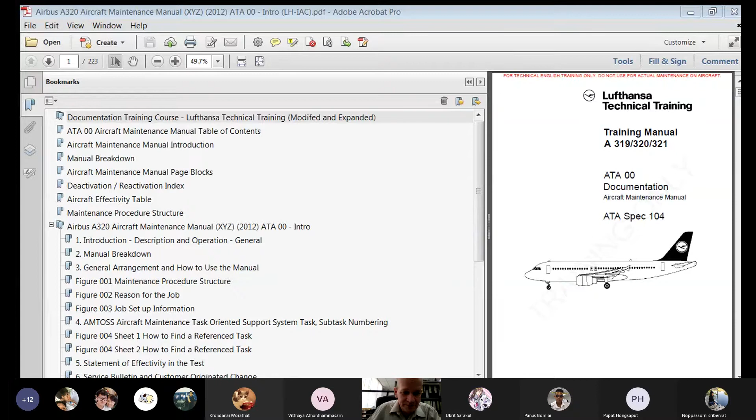16,000 baht. Right? Per day, every day of the year, 16,000 baht, almost $500 a day. Somebody's going to just give you $500 cash every day. Will you take it? Are you happy? Happy? Will you study? Don't know. Either they don't like money, Director, or their microphones aren't working, or they're sleeping.

So why do we study? Why do we go to school? Why do you study to be an aircraft engineer? You could have been a doctor, could have been a lawyer.

She says I need to hit something to make it a group call here. I think maybe we have this working. So anyhow, I assume you guys can hear me? Yes, no? Yes, we can hear you. You can hear me. 16,000 baht. Can you say 16,000 baht? 16,000 baht. Panus, can you say 16,000 baht? 16,000 baht. Mr. Panus. 16,000 baht. Can he say it? Nope. Yep, no. Okay.

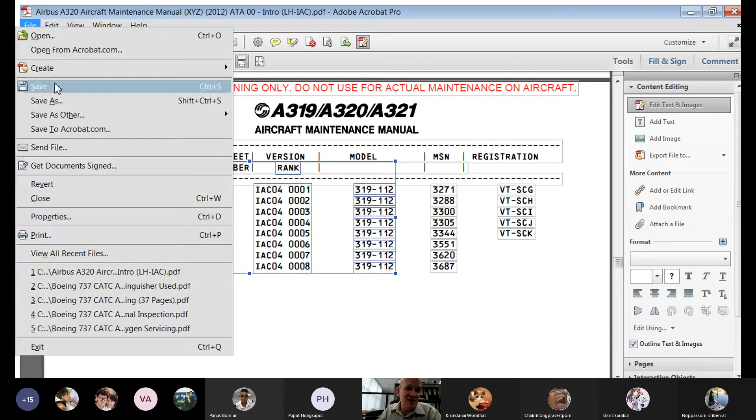The reason being is sometimes I can go in and change the text. I've done that in some places, heavily on the Boeing manuals, by the way. There's a lot of things in the manual where I've gone in and changed what it said, and you may not find that information is correct anymore. Some of that was done on purpose so that we could have training material that fit a little bit better than what the original version said.

Okay, so if you see this R right here, there's an R as in Romeo right here. This indicates that this part of this page was revised. In this case, they have aircraft in their effectivity chart, Indian Airlines. They've got serial numbers 3551, 3620, 3687. At the time they did this manual, they probably were still on the factory production line. They just ordered this airplane. It has not been registered yet. These three aircraft do not have registrations. They're not actively flying yet, so they may still be on the factory floor being produced.

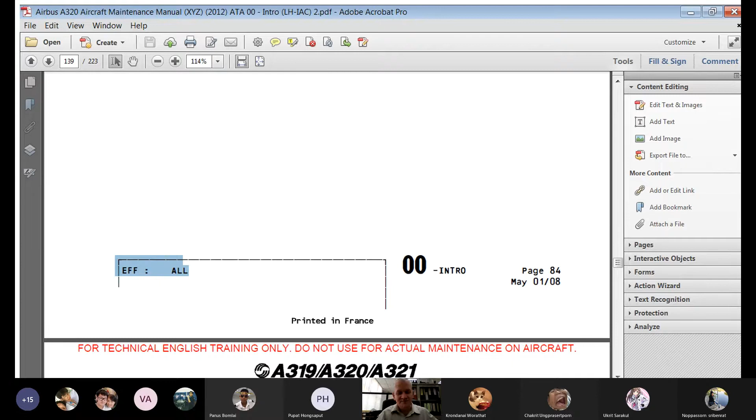And then this is May 1st of 2008. That's the date this page was effective. That's the revision date. Effectivity. Effectivity is a strange sounding word. It's only used in aviation. If I'm working on aircraft, what airplane numbers do they use here? Customer fleet serial number. So they'll say 902. You might be working on 902, but at this time in 2008, you wouldn't be working on aircraft 907 or 908 or 909 because they're not registered yet. This airplane here was nice and new back then, aircraft 906.

Notice that has nothing to do with the serial number of the airplane or the registration. Continental was nice to us. If we had an effectivity number of 906, then the last three numbers in our registration number would be 906. They would arrange with the FAA to get a registration number whose last three numbers always matched our fleet effectivity. So if you didn't know what airplane effectivity you had, you could just look at the airplane and say, oh, we're working on 021.

United Airlines uses 4-digit effectivity numbers and they paint those on the nose gear door. Sometimes United's numbers don't really correlate to anything logical. So if you're working on a United Airlines airplane, you have to look at the nose gear door. So continuing on. Now this is boring, but this will help you. When you're doing a project on something, you'll understand how and where to look for the information.

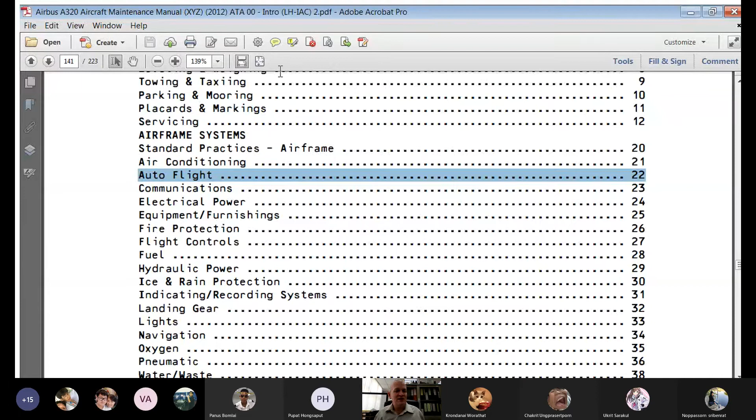Fuel system, ATA 28. On the 747, if I go to a military base, I'm in a civilian aircraft. The U.S. military, maybe they're sending troops somewhere, they charter the aircraft. Their fuel truck operator will only operate the fuel truck. He will not touch the fuel hose. He will not install the fuel hose onto the aircraft. He will not operate the fueling panel.

It'll be my responsibility to drag the hose up, hook it up to the airplane, and then I have to put the fuel into the tanks. He'll turn the pump on the truck on. I have to control which tank I'm going to put the fuel in and make sure that my fuel load matches what I want for dispatch. However, the process on how to fuel, how do I fuel a Boeing 747-400? Oh, do I look in ATA 28?

Hydraulics, do I look in ATA hydraulics? Oh, I want to add hydraulic fluid to the reservoir. ATA 29, hydraulics. Landing gear, I want to service landing gear. Need to put nitrogen in the landing gear strut or hydraulic fluid. I want to put air in the tire. By the way, don't put air in tires on commercial airplanes.

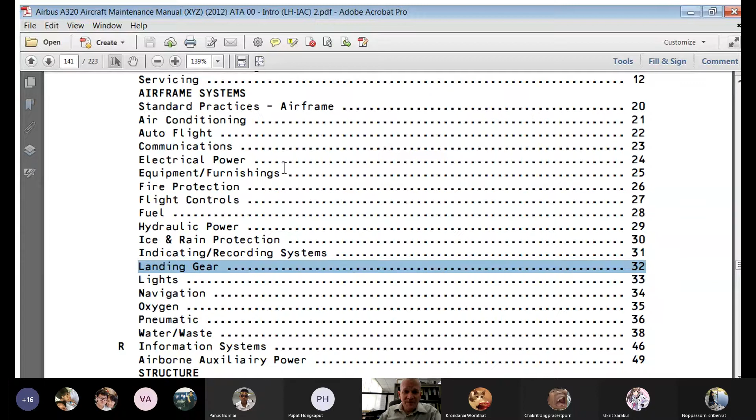So now we've mentioned all these systems, but we're servicing. This is the question. How do I service the fuel? How do I service the toilet system? Oh, ATA 38. Glad I don't do that. That's dangerous. ATA 12, servicing. Most of the GenFam tasks that I have on the folders, I put the links on Facebook, you guys can download them. Most of those tasks are from ATA 12, from servicing.

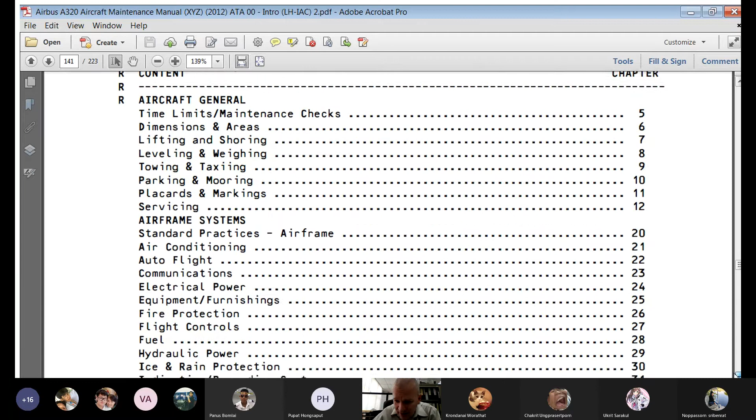How do you add oil to the engine? How do you even clean cockpit windows? How do you do these things? It's in ATA 12. So it's important to know your manual breakdown. What chapter will you go to? Somebody asked me earlier, because they looked through this, they said, teacher, where's ATA 37? Very interesting that he saw this.

There is no vacuum, ATA 37, on Boeing aircraft. We don't have a need for vacuum systems. Some older instruments, some older systems, you had to have a vacuum pump, a mechanical pump turned by the engine, to create a vacuum pressure. On these commercial aircraft, we don't have any ATA 37. So you won't find 37 in Boeing or Airbus aircraft.

Most aircraft will have a 71 and a 72, both A320 and 737. They follow a pretty good logical approach in terms of what things go in 71, what things go in 72. The actual basic engine, without the thrust reversers, without the cowling, those things will be in ATA 72. The things that are outside of the actual engine that you would lease from the company, things more attached to the aircraft itself, like the cowling, they would put into ATA 71.

Standard practices, you notice it's 70. Standard practices engines. If you have something, maybe it's not covered in 72, check your ATA 70. Things like torques. How do you use safety wire? What lock wire procedures do you have? What kind of safety wire can you use on an engine?

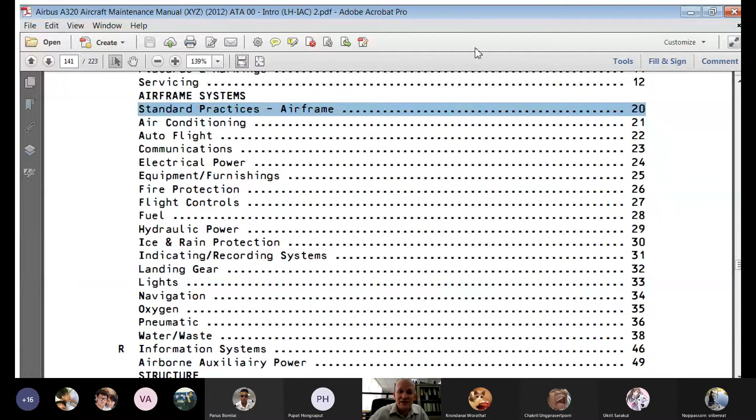Standard practice is airframe, ATA 20. So a lot of the things that you would do on the airframe that are common tasks, these would be in ATA 20.

Any questions? Anybody awake?

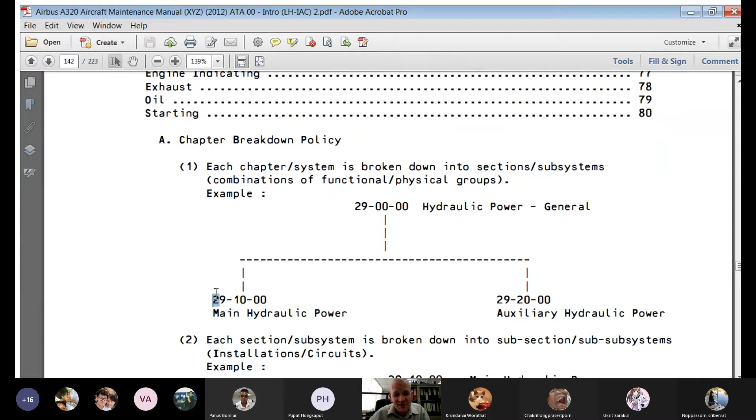So within your chapters, you'll have a breakdown of things where, like, ATA 29 is your hydraulics, general. ATA 29-10 is main hydraulic power. ATA 29-20 is auxiliary hydraulic power. So they have things called ram air turbines, like a backup source of auxiliary hydraulic power.

That would be here. To open a cargo door in an A320, there's a small little electric pump that will only operate a hydraulic system, so you can open the cargo door. I would imagine, if I needed to look for that, I would look in 29-20 first. I don't think that would be under 29-10.

So 29-10 itself then breaks down into 29-11 for green, main hydraulic power. ATA 29-12 is blue, main hydraulic power. #1 engine. On most Airbus aircraft, you're going to have pumps on both engines. A320 is a little different though, but A320 we do have an engine-driven pump. Green main hydraulic power.

A300s, we had 2 pumps on green system, #1 engine. We had 2 engine-driven pumps on blue system. And then yellow system, sorry, we had 1 pump for green, 1 pump for blue. We had 2 pumps for yellow system on A300. A320 doesn't do that. They use something called a power transfer unit. And then they have the 1 engine-driven pump.

We'll deal with that later because that's a little more difficult to explain. This is just how you use the manual system. But I know there's probably at least one person out there who knows how this Airbus system works, but the A320 is a weird airplane hydraulically.

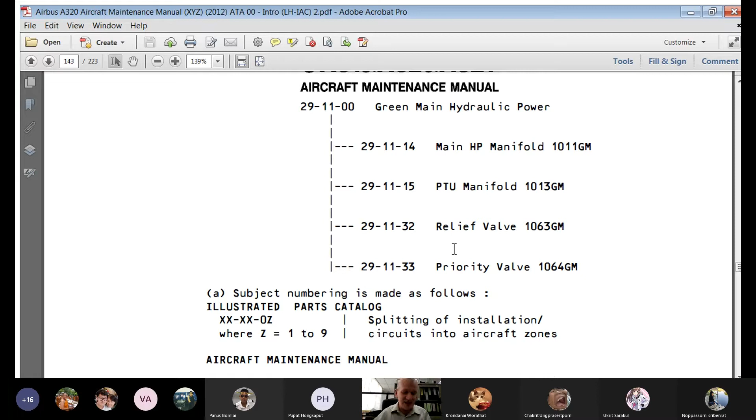This manual is February 1st of 1996. A lot of things have happened since 1996. Maybe the information is different. So you don't want to work from memory, because we've had cases where people have gone and signed things using their cheat sheets. And then they'll have specific task numbers that will have changed. And they sign off using an out-of-date reference, and then they end up in trouble because they didn't actually use the manual.

So also in Airbus, Boeing, you're going to have standard practices manuals. For Airbus, they just have one standard practices manual for the airframe, then they have an electrical standard practices manual. Boeing will have a standard wiring practices manual, and then a standard overhaul practices manual.

Now, standard overhaul practices, you would think that doesn't apply because I'm on the flight line and it's a through flight. But still, a lot of Boeing manuals will refer you to go to the SOPM. If you're going to repair, let's say, a cabin floorboard has a fault, you need to do a patch. It may refer you to the standard overhaul practices manual.

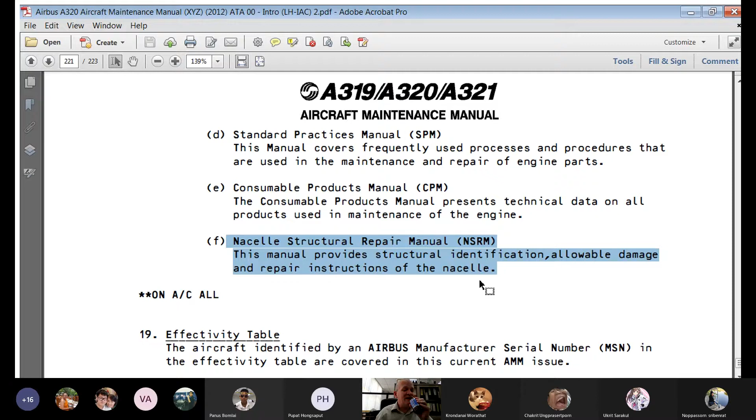But effectivity table. You will want to make sure that for your aircraft fleet number, you're using your correct effectivity. So in this case, they say the aircraft identified by an Airbus manufacturer serial number in the effectivity table is covered in the AMM. So you would not want to use some of the manuals that I've given you guys that you can download and you can read for fun.

You don't want to use one of these manuals to work on an airplane from a different airline, because a lot of times some of the options that were available for Continental Airlines may not have been available for the airplanes that went, let's say, to China Southern. And then things like torques may be completely different.

So for Indian Airlines, you can see there's going to be a big difference between aircraft 14, which is in this block, and aircraft 901. Aircraft 14 is an A320. Aircraft 901 is an A319. Different size airplane, but also completely different engines.

CFM56, this is the same type of engine that you're going to find on your 737-800 series aircraft. The 737 uses a CFM56-7B. The Scarebus uses a CFM56-5. Indian Airlines with their A320s, A320-231 series, they're using the V2500. This is an engine that's made by an international consortium. One of the biggest manufacturers that's part of this organization is Pratt & Whitney. You guys know Pratt & Whitney from your T6 engine.

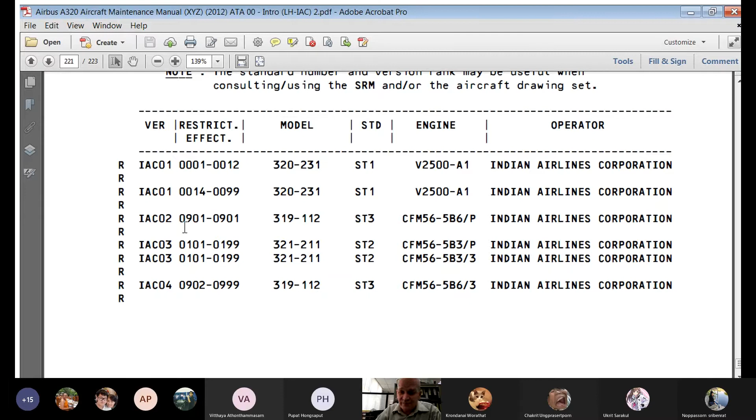So you guys are all smart. Nobody's asking any questions, so I'm sure that you're all experts on how to use manuals.

In this document right here, February 1st of 2007, you'll notice that there are all of these R's here. What do these R's mean?

Pirate movies, they all say R. Pirates of the Caribbean, R. R, matey. Gotta watch the R's.

The R means revision. Something has been revised. In the case of this particular page in 2007, I would guarantee that all of these are actually not things that have changed, but they have completely added all of these sentences that are here. So they're saying specific features for the AMM and AirNav/maintenance environment. They give out DVDs. We have some of these upstairs in our library, where the entire set of manuals for this airplane is now provided in the digital environment on DVD in something called AirNav.

And then Airbus would then issue out other DVDs with temporary revisions that somehow would either just be viewed separately, which is what I suspect, or they could actually come in and patch like an update and change the data. We have these discs upstairs for A330, A340, but unfortunately we no longer have Windows XP. I think Windows XP was the most advanced computer system that would operate these disks. So I've tried to get some of these to run, but they don't.

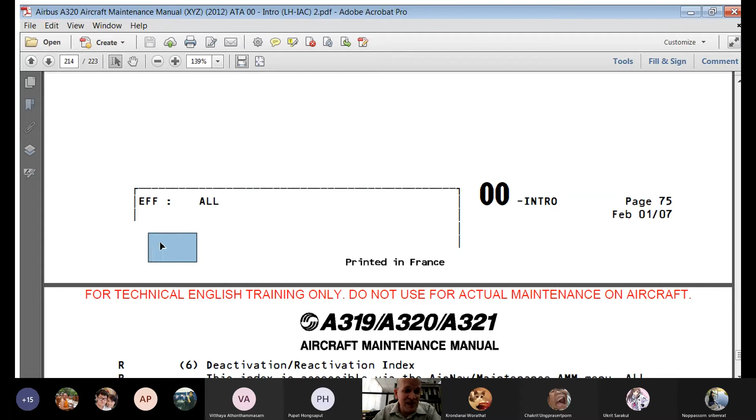Effectivity. Effectivity means that this manual covers all aircraft that are operated by this airline. Down here, normally, it would have a 3-letter code identifying the airline. And I think it was IAC for Indian Airlines. But I edited it out because this is for training only.

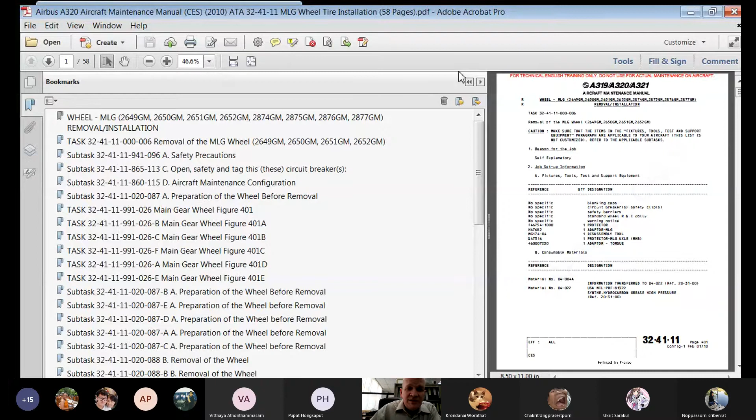So for those of you who have seen an Airbus A320, you will recognize this. There are 4 main landing gear wheels. Each wheel has a brake inside of it. There are no hydraulic brakes on the nose wheels. However, the Boeing 727, they actually had brakes in the nose wheels on some aircraft. I just saw that the other day for the first time on the internet. That 727 that this guy was operating, they had brakes in the nose wheels as well as the main.

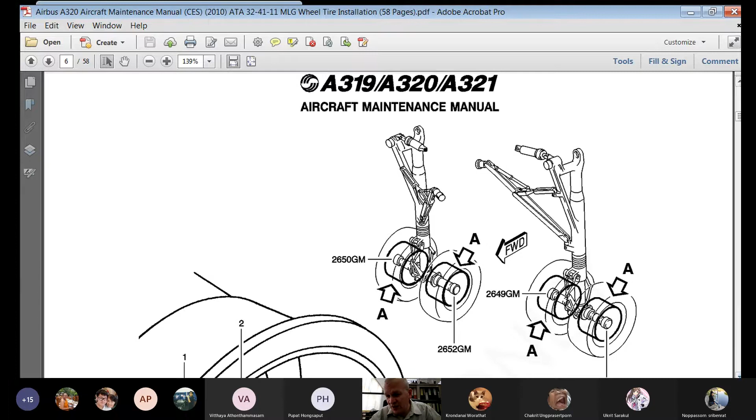So most of you guys, when you see your 737 or your A320s at the airport, you're going to only have 2 wheels on each axle. Each of these components is identified by an FIN, functional item number. So right here, this 2650GM, this functional identification code, is used in every manual: IPC, troubleshooting manual, wiring diagram manual, system schematic manual. All of these manuals across the entire system will use this number.

So if I had a computer with my Boeing toolbox inside of it, or Airbus airplanes put into that, you could find these numbers. Boeing uses a similar system, and I could type in that number and it will cross-reference every time that item is referred to in every manual across the entire fleet. This will greatly help troubleshooting. I think I'll have 11 different manuals that cover different parts of the Boeing 747, but with these identifying numbers, it'll pull up all of the suggested things I should look at across every single manual system.

So with this picture here, we have 4 main landing gear wheels. At the bottom of the page, we will notice that our airline effectivity is CES. I believe this is China Eastern Airlines. So in China Eastern, from aircraft 01 through 49, 101 through 149, this particular picture covers those aircraft. Airbus, you have to be very careful because this says configuration 1.

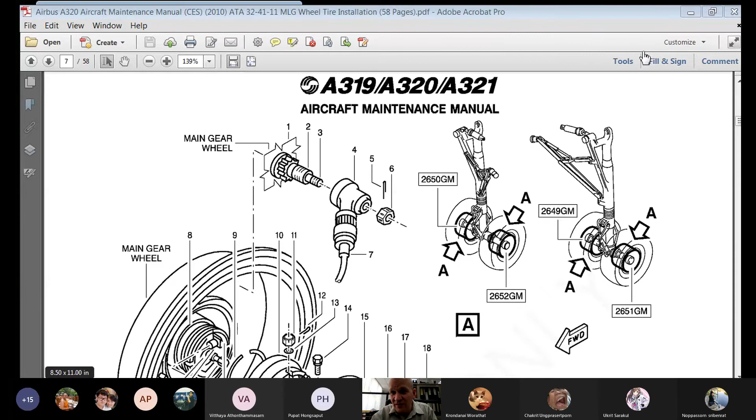So effectivity is important because we have to know what configuration aircraft we're working on and have our manuals reflect that. We don't want to use manuals from a different airline because maybe the information is not the same. And I will show you an example of this.

We have extra music in the background for... there we go. Can you see this, engineers? Yes? No? No, you can't see this? Yes, I have seen it.

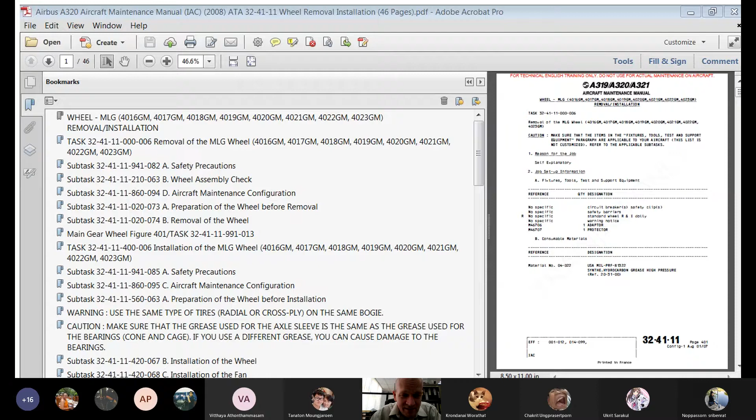Okay, now maybe it's hard to see, but you notice the letters don't look quite so clear, a little bit more fuzzy. This is IAC, so this is Indian Airlines. Previously, we were looking at CES, China Eastern. If we were working on Thai Smile, it might say TII or TYS, and I can't remember which. Between Boeing and Airbus, somebody uses TII, somebody uses TYS. So if you're working on an airplane that came from Indian Airlines, IAC would be what you'd want to see down here. Effectivity.

Indians are superstitious. They're following the British superstition. In Britain, you're not going to have an aircraft 13. Passengers won't fly in it. If they see 13, they'll be scared, they'll run away. I have seen an aircraft 13, I think at Continental Express, but a lot of airlines will skip the number. So any aircraft from 1 through 12, 14 through 99 is covered by this effectivity.

So we have to watch for the airline, the actual airplane type, the configuration. This one's configuration 1. Configuration 1 has popped up again. But I guarantee you, this configuration 1 on this manual is going to be a lot different from the configuration 1 wheel and tire assembly on the other airplane. Even though it still says 324111, configuration 1, I guarantee that between these airlines, there's a huge difference.

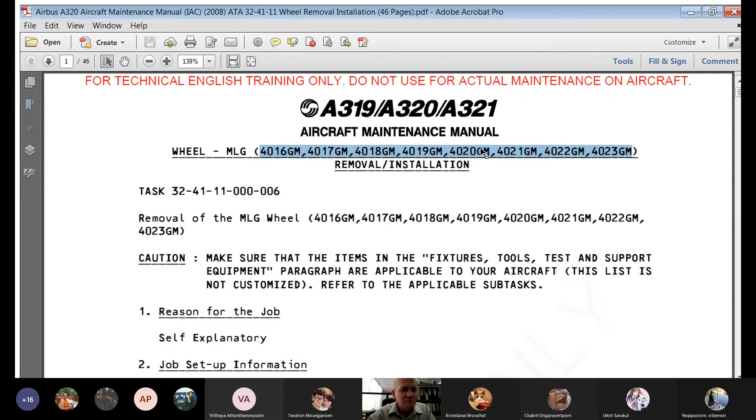Our functional numbers for our main landing gear wheel, we have 8 numbers. But we only had 4 wheels on the other airplane. Why are there 8 functional identification numbers?

And this is why effectivity can be very important. You want to make sure that you have the correct manual for the correct type of airplane, because this Airbus has got 8 main landing gear wheel and tire assemblies, each with a different FIN. Indian Airlines wanted this option from Airbus. They're the only customer that I know of that purchased it, where each landing gear has got 4 wheels. Everybody else has 2 wheels.

I hate Airbus A320 main landing gear wheel and tires, because here in Thailand, you'll have friends. You'll work, maybe 4 people will change a tire and wheel assembly together. In America, you don't have friends. You have a tire or brake to change, your friends disappear, they vanish. Suddenly you find out nobody loves you anymore, and you have to change this wheel and tire assembly alone.

This tall. The wheel and tire assembly on this airplane weighs almost twice what any of you weigh. It is extremely heavy. It is big, it's bulky, it's very hard to change. This is almost as bad as a 747 wheel and tire assembly. So for this aircraft, it'd be nice because it's a little bit easier to change the wheel and tire. But they designed it this way because there's less PSI, less pounds per square inch on your runway surface.

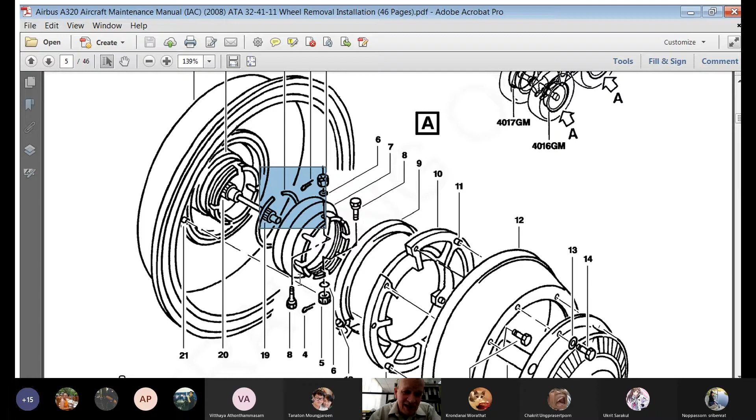You line up the slots so you can install this nut that's here. You put the bolt through with nuts. I notice these ones have cotter pins. This is very good because then these nuts won't come off. When you work on Boeing 737s, always change the nut. Always change the nut because they have self-locking nuts. So a 737 came into the airport when I was working for General Electric, and it was missing a wheel. The entire wheel fell off the airplane.

These little bolts are the only thing keeping your wheel from falling off. 110 foot-pounds of torque. If your wheel's on the axle and it spins to the left, it'll back your nut off. So you want to make sure that after you torque it, when you put these two bolts, these small nuts here, if you're working on the Boeing 737, you want to use new self-locking nuts. NAS 679A4, I think is the part number. You should have them in a bin somewhere in the shop. Grab a handful, keep a couple in your tool bag, and throw the old nuts away, change them, put new nuts on there.

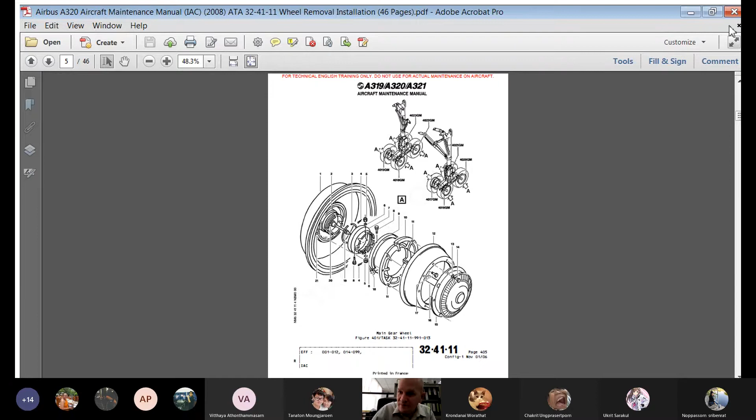Most of you guys can see Facebook. I added on Facebook Boeing 737 and Airbus A320 tasks. You can download these as a zip file from Google Drive. And I tried to pick maintenance tasks that if you go to the airlines and you work there maybe 5 years on A320 or 737, during that 5-year time, you're going to do this task, maybe every day. Some of this stuff you might do very frequently. Other things, maybe you do it once or twice here and there, but I tried to pick something from each ATA chapter, the whole system of chapters, so you guys would find things that are useful to you.

So if we want to service oil, what ATA would we use for engine oil? ATA 39 for engine oil servicing. What do you think? Anybody? Mistake I made this morning. I said ATA 39. There is no ATA 39. There's ATA 79 for engine oil. Very, very interesting. There we go. So maybe you guys have added oil. You put oil in an airplane before? Sometimes, maybe, yes, no. ATA-79 would be engine oil.

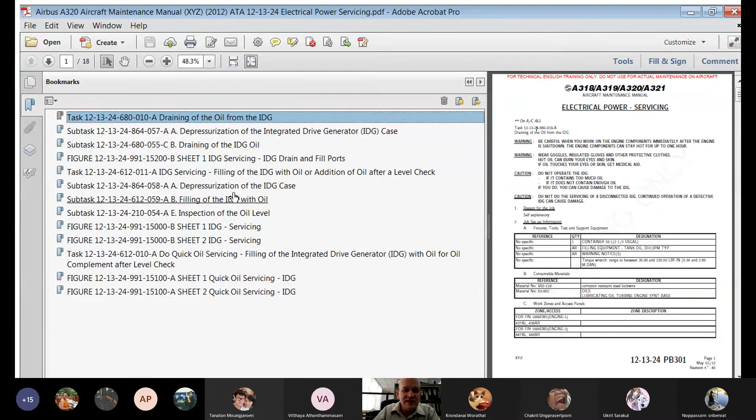We are adding oil to the integrated drive generator, IDG. These things are heavy, but they're useful. They generate electricity. Without them, you cannot fly the airplane. You need to have your generators. So you might have to fill your integrated drive generator with oil. Notice this subtask 12-13-24. If you just signed off saying, yeah, I serviced the IDG oil in accordance with 12-13-24 AMM, that's very vague. It's very general, not very specific.

If you're very specific and you say you serviced it in accordance with subtask 12-13-24-864-058-A, you'll want to make sure that you did everything that's in there precisely and that you read this task. You don't want to use your cheat book and say, oh, IDG oil, we service it 12-13-24-864-058A, and you just signed the logbook using the little cheat book that you keep in your pocket, never look at the manual.

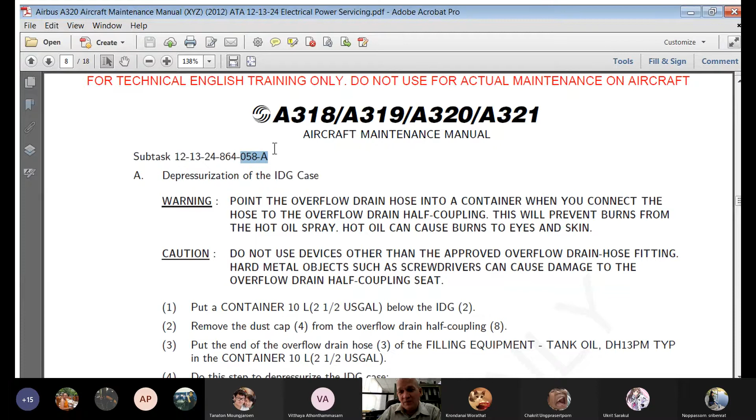Because Airbus has a fun tendency, Boeing as well, 787 is even worse, that if there's a major revision, they will completely change the last three numbers of these subtasks. So your subtask all of a sudden might be 942 instead of 058A. And then your government inspectors or your quality assurance department might see people keep signing off servicing the oil in accordance with the subtask we got rid of months or years ago. So cheat sheets: it's not about having the right answer to the exam question. When I'm out flying on a 747 over the middle of the Pacific, 45,000 feet in the middle of the night, it's about whether I was right 100% of the time about everything I did.

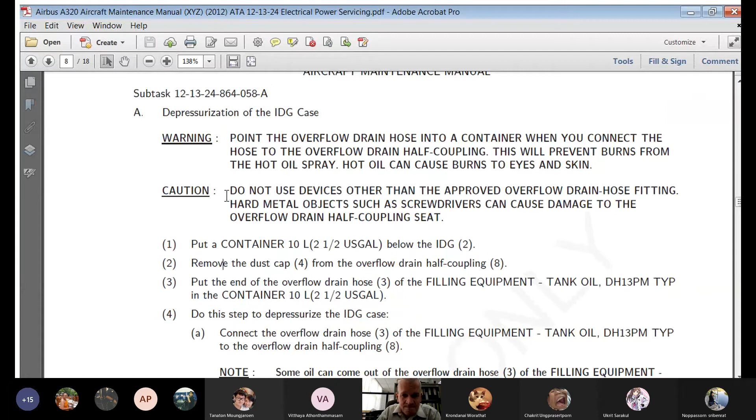So here we have warning, caution. Wait a minute here. We have this QR code. You can scan this. Maybe, maybe not. You can scan that and you can download the maintenance tasks for the A320. Can everybody see this? Yes, we can see. Good. So you guys can download these items so you can have them on your computer.

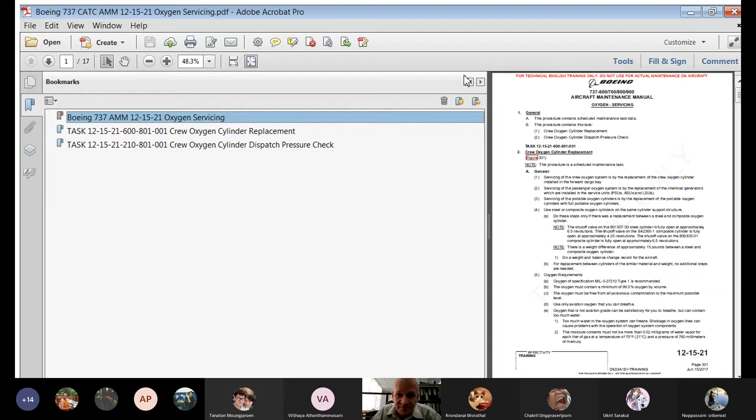Okay, here we have oxygen servicing. You'll notice that we have a different airplane type. You'll notice too here that it says this number right here, D633A101-training. Usually this word here, training, does not exist in any of the Boeing versions of this manual. It would say CAL or UAL or CAT or TII. Your effectivity block also will not say training. It would say all, or you'd have numbers for your aircraft.

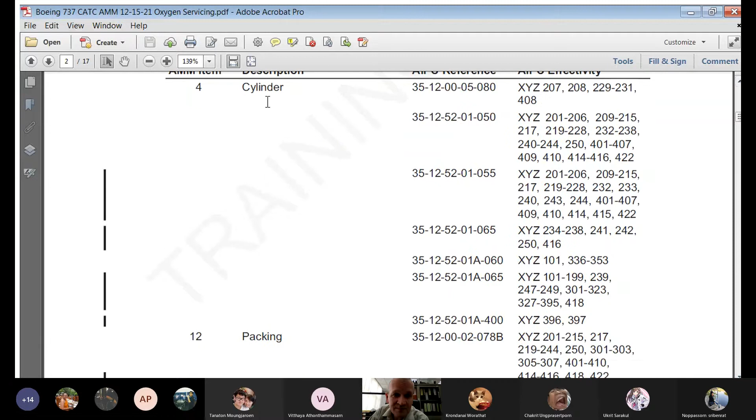You notice here that they give references for the illustrated parts catalog, and they give an effectivity. So here, if you had aircraft 209, this reference for the IPC would be not effective. 209 would be here. So we'd have to look at this illustrated parts catalog to be able to know which oxygen cylinder we would need for the airplane.

The reason I mention this is because there are 3 different types of oxygen cylinder that we can use on a 737. All 3 of them will fit without any modification or change to the airplane, but all 3 cylinders are different. They do the same job, but they are different part numbers.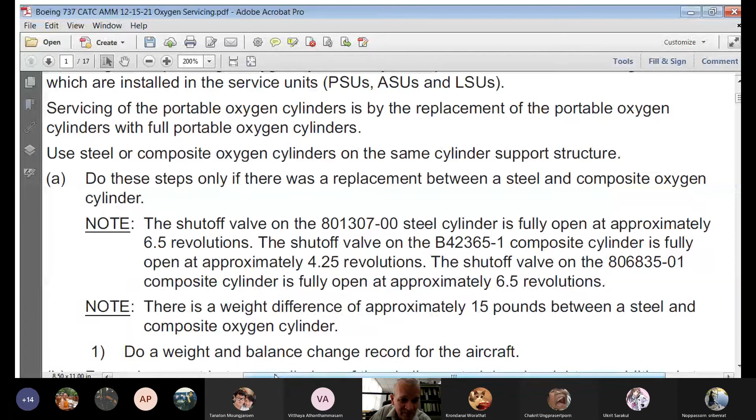So right here, you'd want to watch this note. This is a very important thing to note. Shutoff valve on the 801307-00 steel cylinder is fully open at about 6.5 revolutions. Shutoff valve on this composite cylinder is fully open at about 4¼ revolutions. Shutoff valve on this part number of cylinder is fully open at 6½ revolutions.

If you use a different cylinder, you would need to change the weight and balance record for the aircraft. So if you had a composite cylinder, it would be illegal to dispatch the airplane with a steel cylinder without updating your weight and balance. Then your airplane would be flying illegally. So this is an important thing to note. But one of the most important things to note is how many revolutions it takes to open the cylinder.

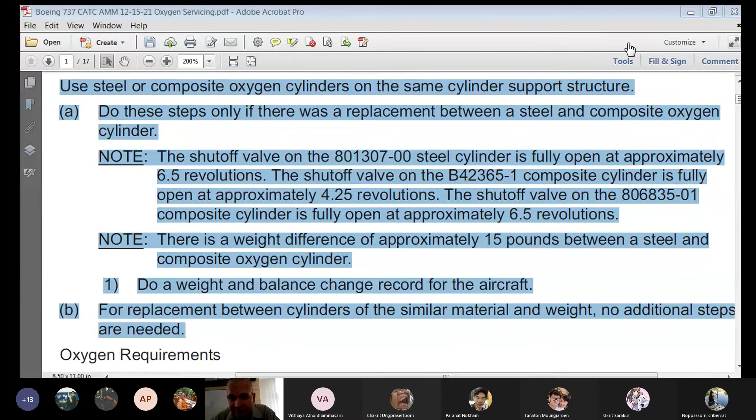Yes, can see. Okay. Maybe some of you have heard of this. This airplane was flying in Greece. The airplane did not pressurize. So in this case, in the back of the cabin, passenger oxygen masks will fall down at 14,000 feet barometric pressure. The passengers take the masks, they put them on. But the pilots in the cockpit, it's not known if they bothered to try to put their masks on, because they didn't recognize the fact that the airplane did not pressurize. So as the airplane starts going up, they started to fall asleep pretty early, maybe as early as 12,000 feet.

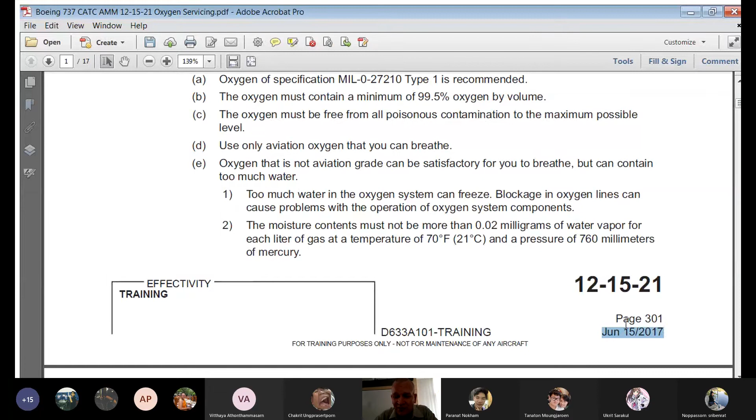You want to watch your revision date. This is the date that this particular page was written. This is fairly recent, June 15th of 2017. This would have been a page that was revised fairly recently, but looking here, there's no letter R in the side. So that paragraph was not revised in 2017. Let's see if there's any R's anywhere, anything that was revised.

Your forward cargo pit is where you'll find your oxygen cylinder. If you go through the forward cargo door, turn right up towards the cockpit, you have panels here. You remove this one panel that's at the bottom, held on by annoying fasteners called cam locks. They're supposed to be quick release. Not really a screw, but something that you can get this panel off quickly. And we go to put the panel back on again and make it a little bit quicker. If it was screws, it might take you quite a long time to get this on.

And then you have your oxygen cylinder here. This is your main aircraft battery. Main aircraft batteries sometimes catch fire, by the way. You can have a thermal runaway and the main aircraft battery can catch fire. So naturally, they put the oxygen cylinder right next to the main aircraft battery.

Does oxygen burn? Anybody? Does oxygen burn? If we have oxygen and we have a match, does oxygen burn? And the correct answer is oxygen supports combustion. So if oxygen comes into contact with a combustible material, there's a source of ignition, you can have a very fast, very hot fire.

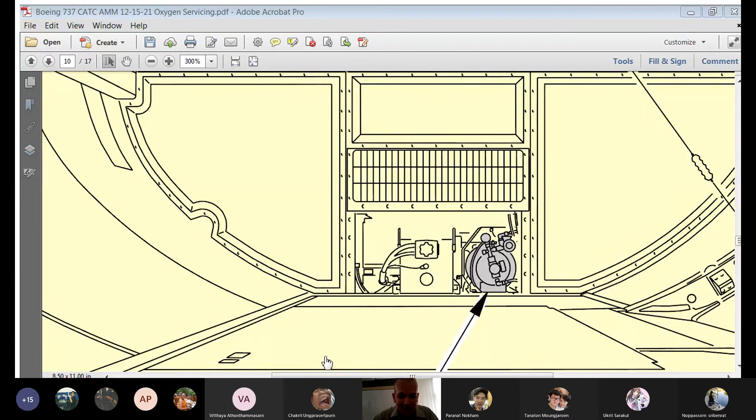You take sodium out, you have to slice up a piece for a lab experiment. You have to be very careful because it can catch fire rather quickly. So sodium in its natural state reacts very rapidly with oxygen. And oxygen itself does not burn, but it supports combustion. So you have to be careful with oxygen because if it comes into contact with any grease, you can have a fire.

In Kazakhstan recently, there was a 737 that was destroyed. The only way that this could have happened, an oxygen fire, is he got some grease on these fittings. As he opened the cylinder up, the oxygen came into contact with the grease and would have caused a fire. Destroyed the airplane. The mechanic got out of the cargo pit okay, but it burnt holes all the way through the fuselage and the top of the aircraft.

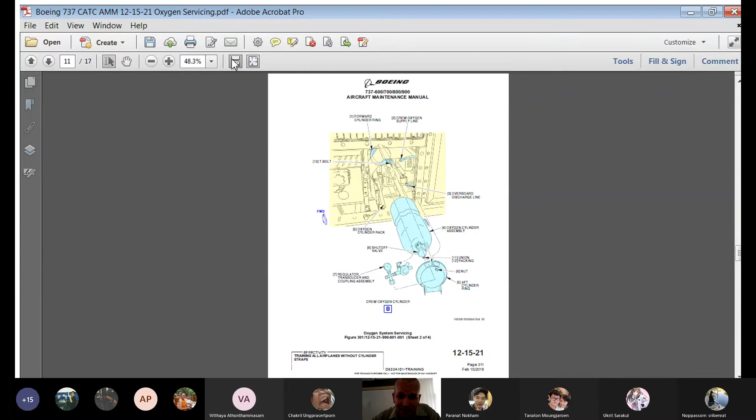Difference in weight between cylinders is 15 pounds. So if for some reason you had a steel cylinder and you had to change the cylinder and you didn't have another steel cylinder, if you had damage on your original cylinder and you couldn't service it, or if you don't have servicing capabilities, if you have to put a composite cylinder in the aircraft or vice versa, the 15-pound difference requires that you do a weight and balance chart revision.

Even though you can throw hundreds of pounds of cargo in the front cargo bay, still something as simple as 15 pounds difference, you have to do a different weight and balance chart for the airplane. And your dispatchers, your flight operation officers would be handling something like that for you. You'd have to notify them.

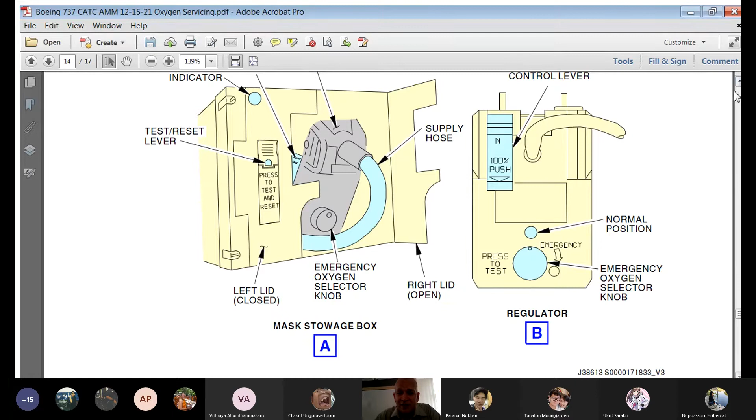This is what your oxygen mask looks like. It stays inside an oxygen box. So you pull this mask out. You can do a press to test. You can listen for oxygen flow. You put it on 100%, you do the test, it'll flow even faster. This verifies that you're getting flow of oxygen to the mask. You can also check your microphone at the same time that way.

But you should watch the pressure gauge, because any considerable drop in indicated pressure on your mechanical indicator on the 737 or digital indication on the A320, any rapid drop in pressure, especially if it comes back again to the normal reading, will indicate that your oxygen cylinder is not fully open. Some pilots like to get in and hold this for a whole 10 seconds to see if the pressure drops.

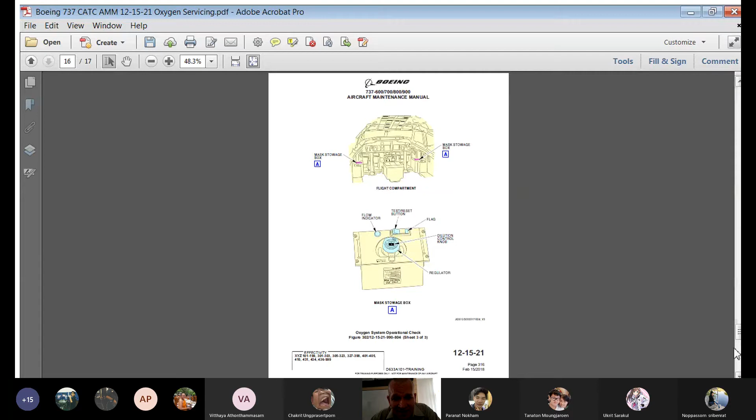This, of course, means you're going to have to service the oxygen again more frequently, but it's the captain's decision. If he wants to sit and waste oxygen to make sure that he's got his bottle open, that's theirs. They've got some kind of a letter. At Continental, they had a letter that said that they should do that. And unfortunately, it means that sometimes aircraft that were within limits for the service check didn't have enough oxygen for dispatch.

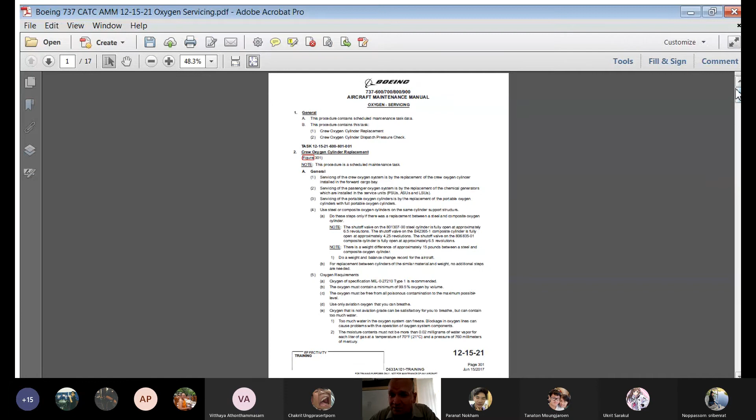After the pilots do this test, now they have to call us out and we have to go and service the oxygen. Then that takes 45 minutes. When you tell the pilots that they're going to have to sit and wait for you for 45 minutes, sometimes they get upset. But there's nothing you can do about it because you cannot service the oxygen bottle rapidly. When you take the cylinder out, there's equipment that will service it, will slow down the rate of transfer of oxygen. So you don't end up compressing the oxygen very quickly, end up with a rise in temperature, and end up with explosion.

So we have to share another document so you guys can see. Something else for you to look at. So going back to our Airbus A320, this one is A318, 319, A320, A321. Down here at the bottom, it says XYZ. So this is a fake code. This is usually going to be whatever airline you're working for. For example, TII, THS, CAT, UAL. This manual originally, before I modified it, might actually have been AirAsia Malaysia. I think it said AES, Alpha Echo Sierra, and that might have been AirAsia Malaysia, but I don't know the original owner of this manual. I found it online somewhere and downloaded it.

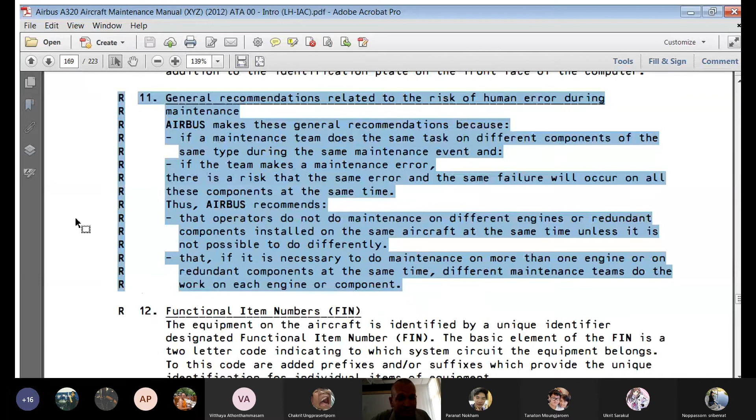So our functional item numbers, FIN. This is that example, 14CA1. You'll find this number is used everywhere within the manual system.

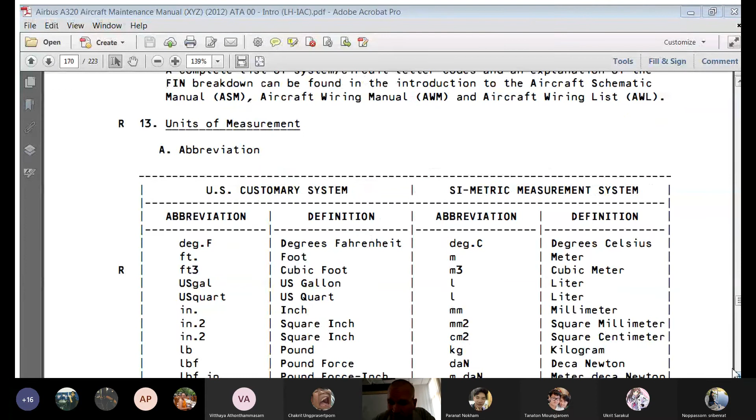Abbreviations in Airbus, you'd also find them in the introduction section in 00. Airbus loves abbreviations. So you have pages and pages of abbreviations. You probably will memorize some of these, but if you can't remember them, this is where you would go back if you're looking in the AMM. And it keeps mentioning things like FPA. You don't know what that is. You come here, you can see that means flight path angle. And of course, unless you're a pilot, you probably won't know what flight path angle is either.

Elsewhere. Aircraft in clean configuration. We determined that Airbus considers clean configuration to be that the flaps are at 0, which means also your flight spoilers on the top of the wing would be stowed.

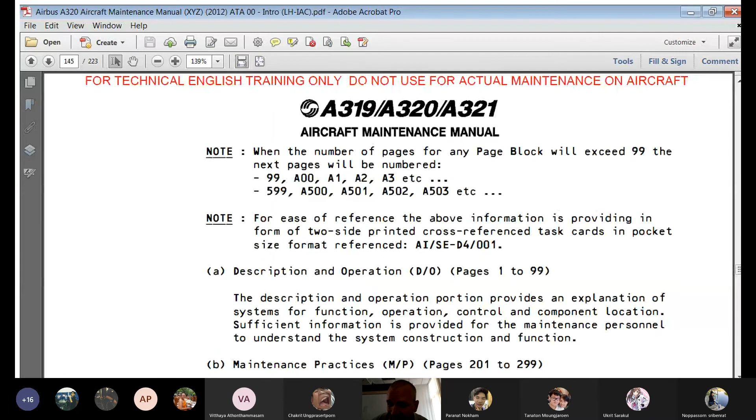So in our page block breakdown of the manuals, if you want to work on a hydraulic system, your page block, lower right-hand corner of your maintenance manuals, if the pages are numbered from 1 to 99, that means it's just description and operation. In Boeing, this would be page block 201. Now in Airbus, though, they go with maintenance practices on page block 201. So actually working on the airplane, let's say jacking the aircraft, applying electrical power, installation of safety devices.

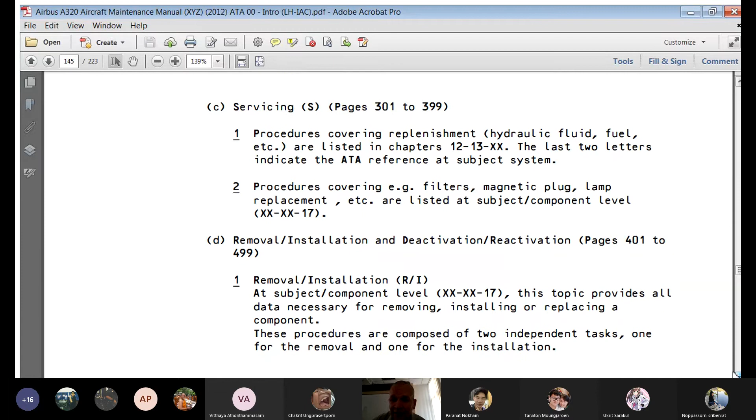Servicing, page block 301. Removal and installation, page block 401. If they run out of pages, which you'll see eventually in engine inspection, borescope inspection, it's more than 100 pages, they'll add a letter. So they'll still use numbers that would fall within this range, and then they just add a letter. I think they add the letter A before the page. So you end up with page A401 through page A499.

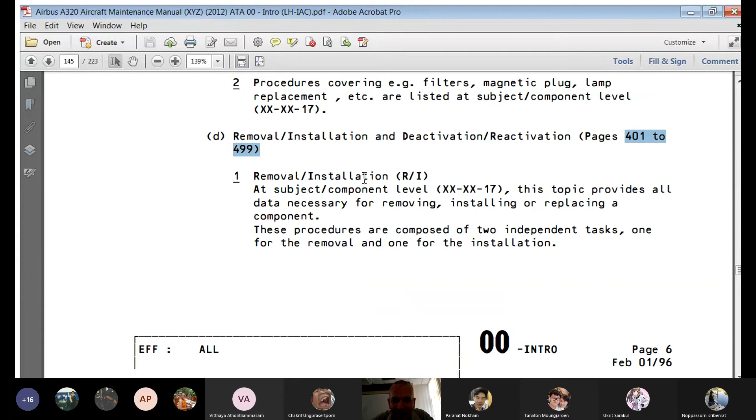Deactivation and reactivation. There's a section here, deactivation and reactivation. The deactivation procedures describe the procedures to be performed to allow flight operations with a system or part of the system failed. So you have, for example, 3 autopilots. You can fly with 1 inoperative. The other 2 have to operate. So then things like this would be covered in the minimum equipment list, MEL, or CDL, configuration deviation list. They say MMEL because people like the FAA will have a master minimum equipment list.

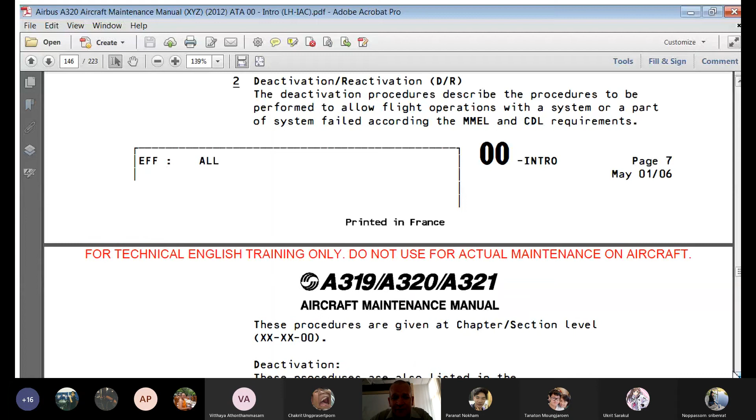Most likely you guys will work at big enough airlines that you will just have a minimum equipment list. It won't be considered master because you're not using the FAA's or EASA's version of the MEL. You'd be using your own airline's version of the MEL, which has the same information, but will maybe look completely different. You might even have a digital version, whereas the FAA may only put out a PDF or a paper version. So you might deactivate some things to fly with a system that's not operating, and then later you will have to reactivate it. Example of this would be like a thrust reverser.

I'm sure you guys have heard about the 767 that crashed in Thailand. It had a thrust reverser deploy in flight. This causes one engine to be producing forward thrust. The other engine was producing reverse thrust. The aircraft suffered structural failure in flight, disintegrated.

The thrust reverser that had deployed should have been deactivated and locked closed, but it was not. It would have been much safer just to do a deactivation per MEL. Somebody actually disassembled the directional control valve, tried to fix it, and then reassembled it. You do not disassemble hydraulic components on the ramp, try to fix things, and then put it back together.

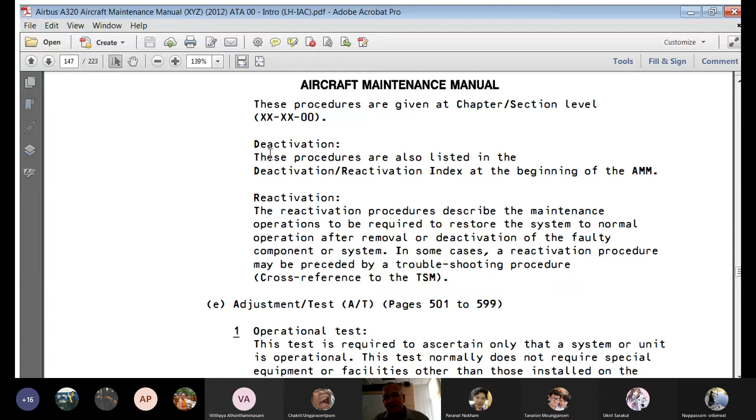That should be done at a repair station that has authorization, tooling, training, and supplies to be able to disassemble and reassemble hydraulic components. It's not like the T6, we just pull it apart and try to fix it because it's experimental category.

So your adjustment tests will be covered in Airbus on page block 501. Further defines that you have an operational test required to ascertain that a system or unit is operational. Functional test, ascertain that a system or unit is functioning in all aspects and in accordance with the minimum acceptance criteria. And you have system tests, contains all adjustment specifications and tolerances required to maintain the system. So they have different levels of tests.

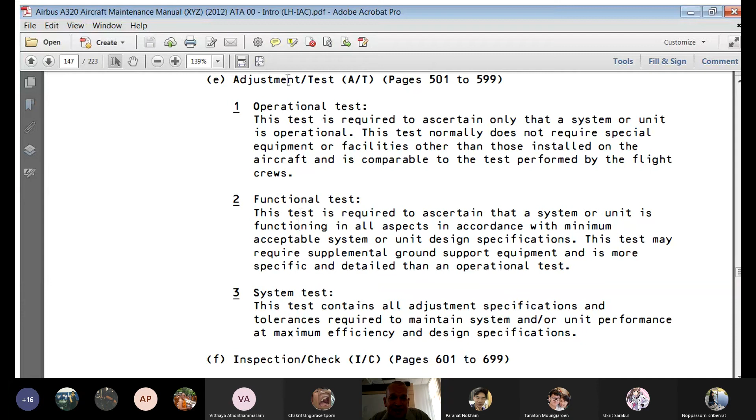Inspection and check. If it says it's a general inspection, basically you're just looking at the aircraft to see if the airplane is in one piece. You're not using magnifying glasses. You're not using eddy current machines. You're not doing detailed inspection. You're just doing a general inspection. The airplane flew in. Will it fly back out again?

But then if you do a detailed inspection, then you're looking for specific items, installation, or assemblies to detect damage, failure, or irregularity. You're trying to do a much more thorough inspection. You're trying to find trouble. General inspection, you just want to walk around the airplane and make sure that the wings are still there, the engines are still there, no big puddles underneath the airplane. You're not looking for trouble. Detailed inspection, you're starting to look for trouble.

General visual inspection is what you would do maybe on an overnight check. Nothing too carried away. You're not going out trying to look at every single part of the airplane with a 10 power magnifying glass, look for cracks or anything. You're just looking for obvious damage, like a bird strike or maybe a truck ran into the airplane.

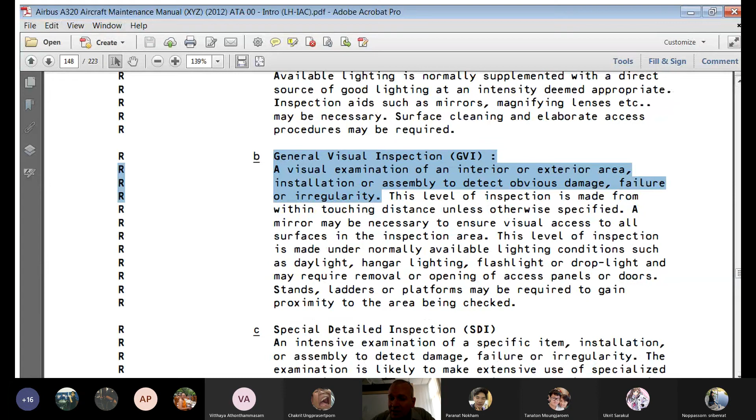Special detailed inspection, this is where you do something like we did with eddy current, where you're really trying very hard to detect problems. You're looking for trouble. You schedule the airplane to be in a hangar so that it's somewhere where you can do the work. You're doing a borescope inspection. This is special detailed inspection. You're trying to detect some damage.

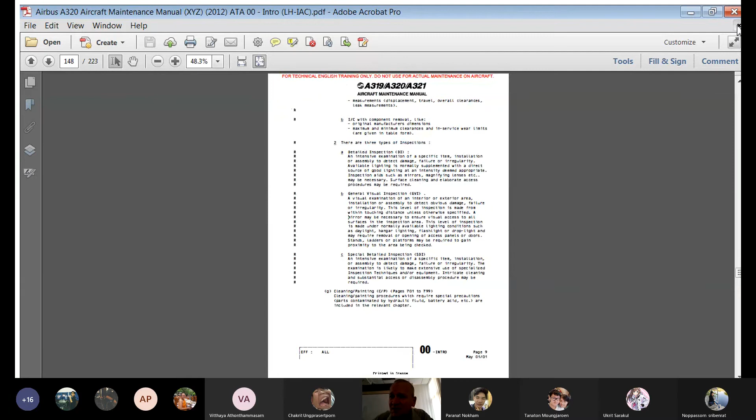Cleaning and painting is in page block 701 of your manual. So if you want to clean and paint, you'd be looking in an area like that. So we'll look at some specific examples. I'll get you guys another manual to look at.

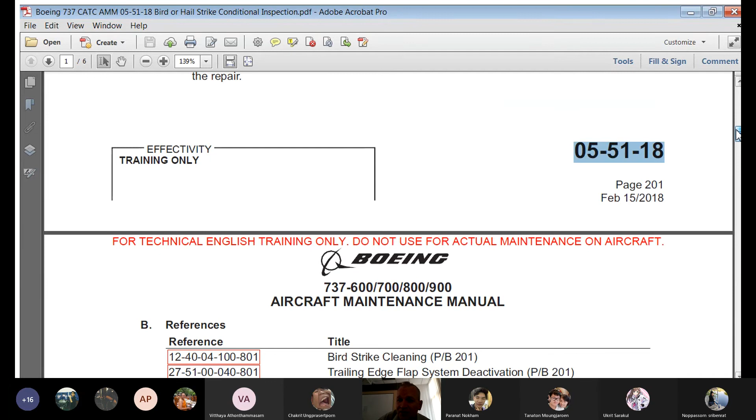But for whatever reason, commercial airplanes at the airlines, almost every airline manual will have bird and hail strike conditional inspections all listed as one task. But you'll notice, well, here they use a separate task number, 05-51-18-210-801. Later on for hail damage, they have a different task number.

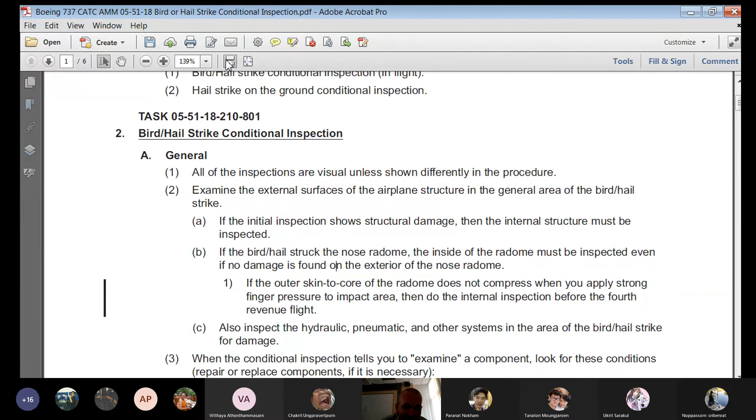So it says here, if your bird or hail struck the nose radome, the inside of the radome must be inspected, even if no damage is found on the exterior of the nose radome. So here at the start of this task, they say you only have to check the inside of the radome if you found damage on the exterior of the radome. They contradict themselves because later on they say you have to look at the inside of the radome anyway. Here they say the external and internal areas of the radome in this subtask.

You notice that they say if evidence of bird remains or structural damage are found. However, the way this is worded, they do not say that this bird remain or structural damage is found on the radome. So sometimes it gets interpreted by the FAA that you should have looked at the inside of the radome, even though the bird strike was on the wing.

So the reason why this is kind of important is if you manage to get the screws out of the radome and get the radome open, when you go to close the radome again, you lower this entire fairing down into position and you try to line up the holes in the radome with nut plates so you can install some screws. And it's very difficult to get a 737 radome closed and get the screws put in and torqued. So it might take you an hour and a half when it only took you 5 or 6 minutes to open it. It might take an hour and a half to get it closed again.

You might have to have people sit on top of the radome to put some pressure on it to try to push it to get it to where you can get fasteners in and close that area off. Shut the radome and install the screws.

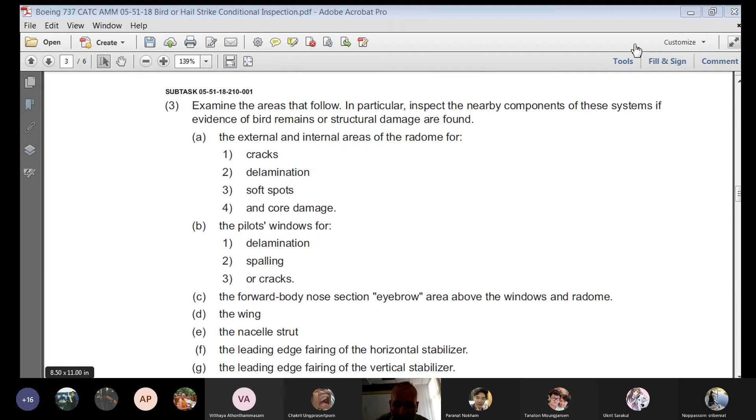Another trick that the FAA can have is they can say that you did not inspect the engines when you sign it off in the logbook. They'll say, oh, you did the bird strike inspection, but did you really inspect the engines? Because there's a separate bird strike task here, 710000800802-F00. This is a specific inspection task for just the engine itself.

You'll notice that they use the ATA for power plant, 7100. If you have to do a borescope inspection inside the engine, that's going to be an ATA 7200. So sometimes things you're working on on the engine, some things will be in 71, power plant. Other things will be in 72, engine, depending on different manufacturers where they think the information belongs. They're putting the bird strike in ATA 71 because this can include damage to your cowlings, your thrust reverser sleeves, and the core engine itself.

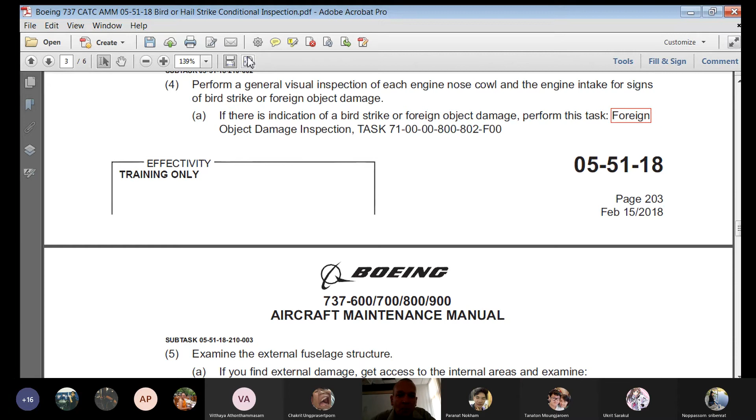So there actually is another reference that could apply to bird strikes that's in ATA 72. So your log page write-up might end up having to include 055118, 710000, and then 72-0000. The 800 indicates page block 800, and this would be inspections and checks. Not very exciting stuff, but if you understand how the books are laid out, it makes it quicker and easier for you to find information in a hurry. That way, if you get a pilot who writes something up that you don't have any experience on, you'll be able to find the information pretty quickly.

The newer Boeing manuals have the addition of some colors. We have a little bit of red here and this box to draw attention to the warning in bold text, slightly larger font than the rest. Do the deactivation procedure for the leading edge flaps and slats. The flaps and slats move quickly. Injuries to personnel and damage to equipment can occur. They're asking you to deactivate the flaps and slats to do a bird strike inspection. This is a bit of a lengthy process.

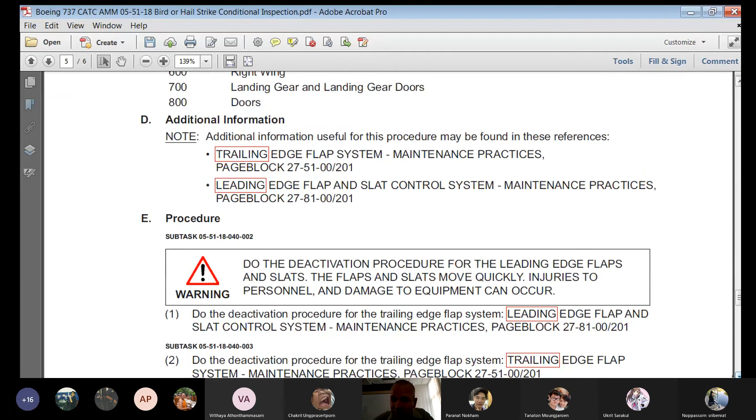It involves installing some blocks and some hydraulic selector valves and other things, pulling circuit breakers. It takes a while to do this and document it, and quite often people will skip that, but then the FAA will have trucks on the airport with video cameras. They'll videotape people performing the work, and then they take them in an office later and they say, can you show us where? Show me where on this video you did this procedure. And then when you say, sorry, sir, I didn't do it, then they give you a maintenance violation, try to suspend your license or just give you a warning.

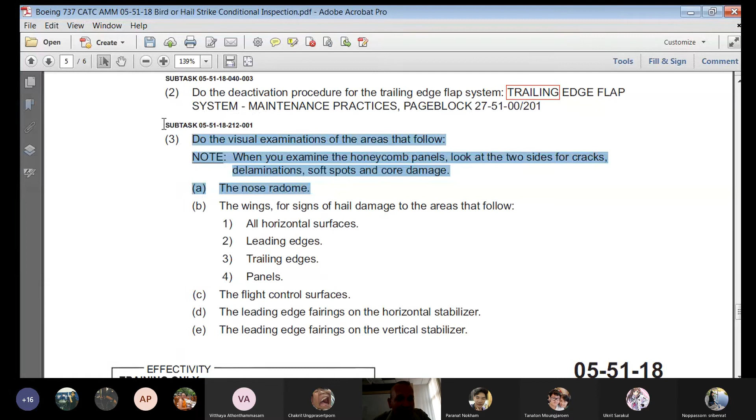This subtask says do visual inspections of certain areas here. They say the nose radome, and it becomes a matter of debate and confusion. Do you have to look at the inside of the radome or the outside only? If you have a question like that somewhere and you've got the manual with you, you have to read very carefully within all of your subtasks and your tasks to figure out, does that particular information apply? So in this case now, that particular part of that reference was not in the bird strike, it was in the hail strike, and it was under this particular task, hail on the ground conditional inspection.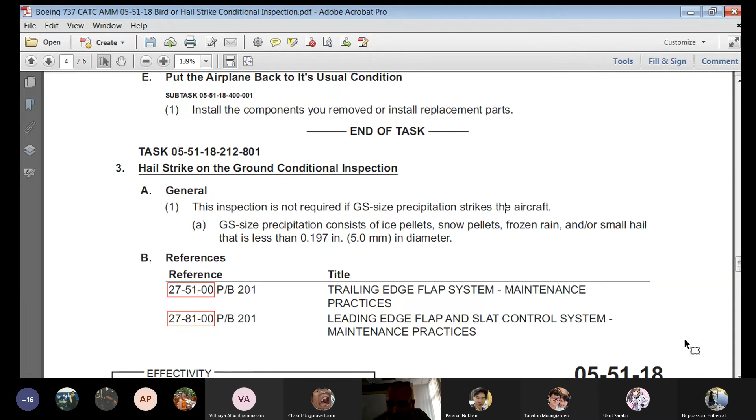Okay, I'll get you guys another manual to look at.

Is everybody having fun? Just think, 16,000 baht. 16,000 baht.

So fuel servicing, ATA 12 for aircraft fuel. Normally fuel is in ATA 28. Chapter 28 is fuel. So if you're going to work on fuel pumps or anything else, you'll notice here, fueling receptacle installation 282111, fueling receptacle removal 2821. If I want to see something more about this system, I can refer to 2821 to get a better idea of how the fueling system is working.

They also mentioned some things here with ATA 49 APU. These references are in here because of safety. Some airlines will say if the fuel truck is already connected to the airplane and transferring fuel, either adding or removing fuel, you might not be allowed to start your APU if the fuel truck is present. Depends on your airline's individual safety policies. They might say you cannot start the APU or do certain things while the fuel truck is there.

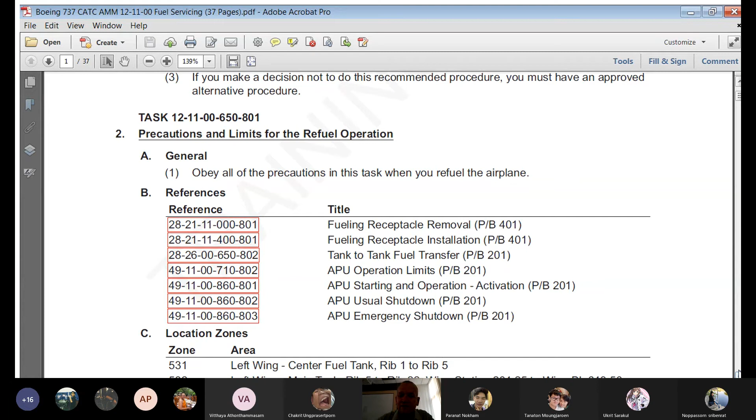You also should never run your APU within 50 feet of another aircraft's wingtip. The reason is that there are rather large fuel vents, about this big across. You can have fuel vapors there, and if the APU is running within 50 feet, you could cause an explosion in an aircraft that's parked next to you. So you have to be very conscious of what your APU is pointing at when you start it. But in the case of aircraft fueling, you have to be careful with fueling and defueling.

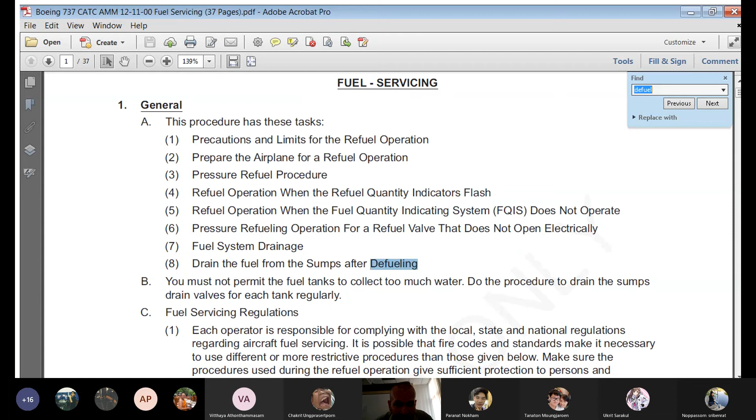So here they have the precaution, APU operations during refueling and defueling. You can shut the APU down during the refueling operation. But it says, warning. Warning means you might get killed. You might blow the airplane up. If there is a protective automatic shutdown of the APU or a failure to start, do not try to start the APU again during the refueling operation. Injury to persons or damage to equipment can occur.

This statement didn't exist back when I was working on 737, so somewhere before February 15th of 2015, this was added to the AMM, probably because somebody caused an explosion fueling an airplane by trying to start an APU that was having trouble. Protective automatic shutdown: the APU has a control box located in the aft cargo pit of the 737-800. If it senses certain parameters, it will shut the APU down.

If your APU shuts down and that was your only source of electrical power, you will start hearing a loud horn sounding in the nose gear of the 737, and that warns people that the aircraft is on battery power only and your batteries are going to go dead. This usually happens if your inertial reference system is aligned and it ends up only on battery power. You hear that horn, you should get up in the cockpit and shut off your aircraft battery.

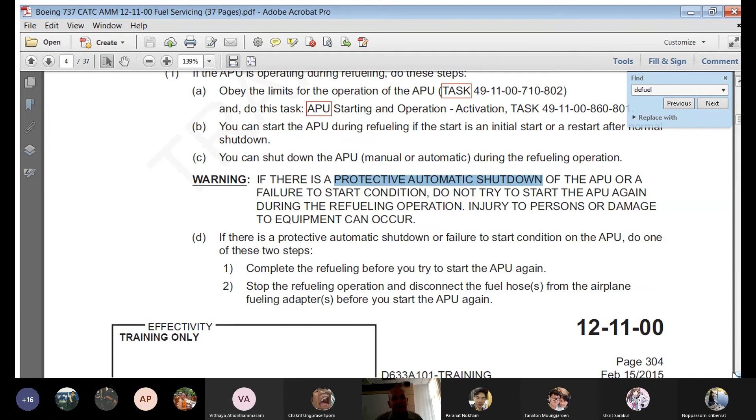So when I go fly in 747s, the civilian airplane, we have military personnel with a truck. They are not going to fuel the aircraft. I will have to attach the hose, operate the fueling panel, and fill the aircraft. All he does is turn the pumps on his truck to provide pressure, and that's it. Everything else, the civilian mechanic does. So for 747, I'll have to go to ATA 12, probably ATA 1211. Somewhere in that page range there'll be something that tells me how to fuel a 747-400.

Interestingly enough, fuel tank defueling, removing fuel from the aircraft, is not covered under ATA 12 servicing. A separate maintenance procedure in ATA 28, 2600, 650-801, tells you how to take all of the fuel in the airplane, turn on the pumps, and put the fuel back into the fuel truck, mostly because you're going to do maintenance inside the fuel tank.

But also it could be that the fuel truck filled the airplane up for a certain flight, and maybe the flight has changed, the airplane's swapped, and now it doesn't need all of this fuel, and they want to remove some because you'll have better efficiency. It might climb faster, carry more cargo, more passengers. So if you're going to do defueling operations, you have to go to ATA 28. ATA 12 is only for putting fuel into the airplane, not for draining it. Any questions?

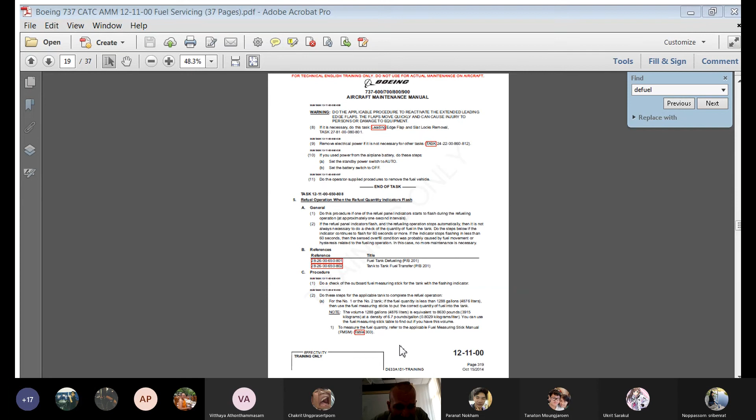So getting back to effectivity, sorry that this is horrifically boring stuff, but basically, since you guys are going to be studying from home, you have to know how you use the manuals so you can do research and find things when I'm not there to help you. So in this effectivity system here, this XYZ is not a real airline. I reiterate, this is a fake airline code. I made this up for our lecture.

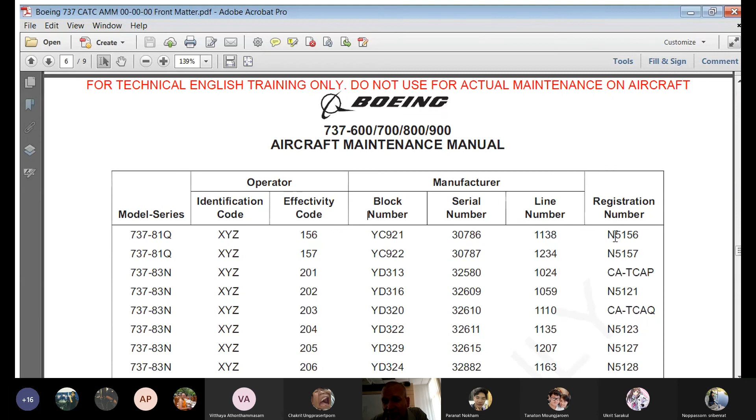Boeing has block number, serial number, line number. Usually you might find a data plate in the aircraft with a serial number, block number, line number. Why they can't just have one number for the airplane, I don't know. Then in the end, your airline will get a registration number. This number right here, that's an American registration. This CA, there is no country that has CA dash and then 4 letters. No country uses this registration. So you notice it actually says CATC, AP, AQ, so CATC. The fake airline effectivity code I made so we could have an exercise to teach about effectivities.

So completely fake registration. But if you need to know your effectivity for an airplane, you look at your airplane's registration, like if we had CATCAP, your effectivity in the manual will be 201. If somebody else is working on CATCAR, his effectivity code is 209 in the manual. Now, if you're working on CATCAT, this airplane right here would be line number 4993. CATCAP would be line number 1024. There's quite a bit of difference in terms of when these airplanes were built, serial number wise.

41268, 32580. So between aircraft 211 and aircraft 201, it's only 10 digits, but you might find out that the airplanes have completely different avionics, different engine models, might be so vastly different that there'd be very little similarity between the airplanes, even if they both look like they're 737-800. There might be a lot of functional differences. The wiring diagrams will look different.

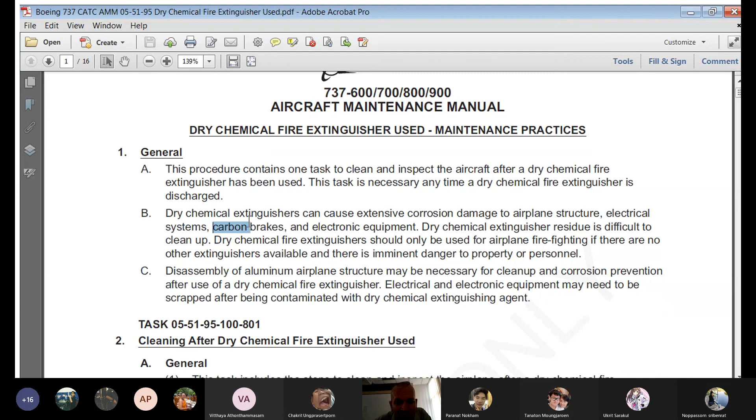Carbon brakes in your landing gear. Your brakes can corrode. They get corrosion. When they corrode, they start to crack. And then the discs break and they fall to pieces. And then you have a brake that's not working anymore, and this is not a good thing. You have to be careful looking at your carbon brakes on 737s because a lot of times you cannot see this damage with the wheel installed.

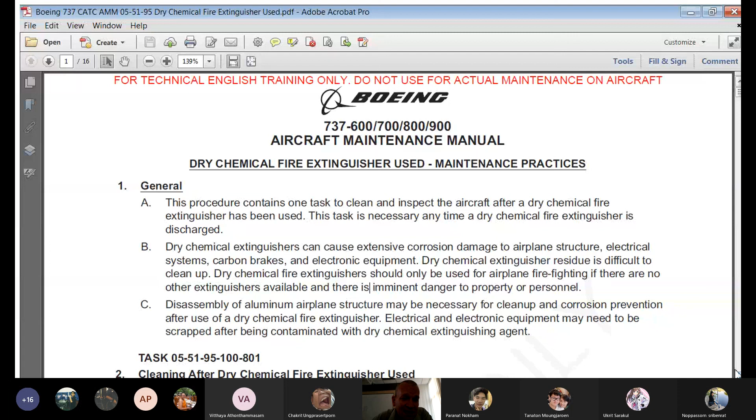So your carbon brakes can corrode. So if you have some kind of a fire extinguishing agent that you use, if you had to use an APU fire bottle, then you would have to do a special cleaning and inspect the area because your fire extinguisher could damage the structure, damage the APU, damage the wiring.

So if you're in a 737-800 and you have a fire warning, you're sitting in the captain's chair. Down here, you'll have 3 fire handles, is what they call it. They have lights in them, and it will say that you have a fire in your APU. You'll get a horn that goes off. And then, unfortunately, you only really have a temperature gauge that shows your exhaust gas temperature of the APU. You don't really have anything that monitors and displays the compartment temperature.

So if you get a fire indication, you can hit the master caution. You can cancel out the warning. You don't hear the bell anymore. The handle's not lit up. Doesn't seem like you have a fire, but if the light comes on right again, your handle lights up, the bell's going off saying that there's a fire. You have no choice. There's a checklist. You pull the checklist and you say maintenance taxi checklist, APU fire. And it will say, pull the fire handle up, wait 60 seconds.

This is very important. If you have an APU fire, wait for 60 seconds. If you use the extinguishing bottle immediately after you pulled the handle up, the APU is still running. Air is still passing through the APU compartment to provide cooling for the APU area. If you have a fire and you fire your fire extinguisher in there and that air is still flowing through, all of the fire extinguishing agent goes out the back and it doesn't always put the fire out. If you don't stop the fire with a fire bottle the first time, you don't have a second fire extinguishing bottle.

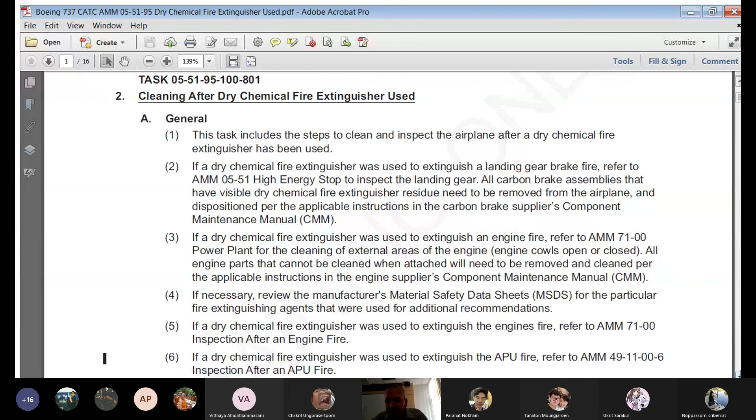It also says on the checklist, pull the fire handle, wait 60 seconds, rotate the handle to discharge the bottle. Then it says, call the tower and ask for a fire truck. So I called and I asked for a fire truck. They did not send the fire truck, but I did what I had to do, and it's on record. It's recorded. If the airplane did have an actual fire, the airplane burned up, at least I did my job. But they basically refused to send a fire truck to the gate, which was not what's supposed to happen.

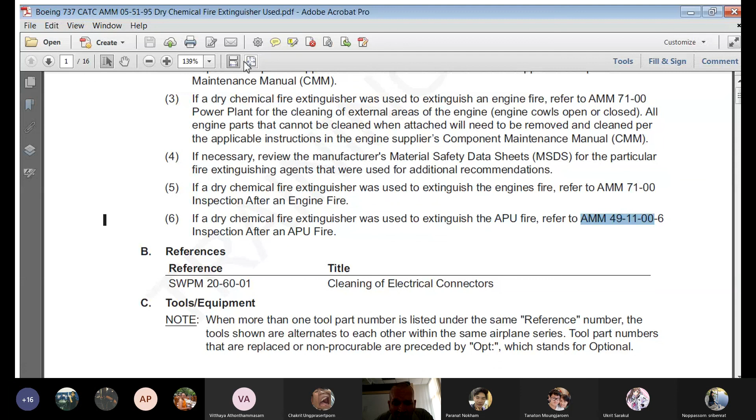So if you use a dry chemical fire extinguisher for an APU fire, you'd refer to AMM 49-11-00, it says -6. I think something's missing here. But you would want to refer to your AMM for the inspection and cleanup. And again, I also mentioned that this should happen as well to the management, and at the time they said they weren't worried about it. So I went back, I opened up the APU compartment, did an inspection, tried to clean it as best as I could, but I guarantee it did not get done in accordance with 49-11-00. They would have probably had to have hired a truck to come in to clean the engine and the APU in the compartment.

So right now it is 15:48. Do you guys want to keep going or do you want to stop? Do you want more? Or do you want to take a break? Go back to sleep, relax. Anybody? Yes? No? Can anybody hear me? Yes, I can. Do you want to finish the class now? Have you had enough fun or do you want 10 more minutes of instruction?